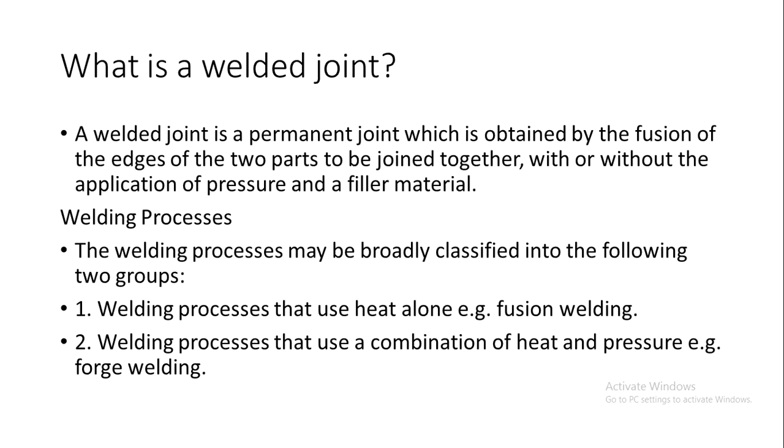So it is when two plates or two edges are joined together by the fusion of the two edges. So either we use a filler material which is the same as that of the plate, or with the application of pressure, two joints are welded. So the welding process can be divided into two groups: welding with the help of heat alone, and welding with a combination of heat and pressure. So when only heat is used, it is called fusion welding, and when heat and pressure is used, it is called forge welding.

So, in fusion welding, there are three different types. We have the thermite welding, gas welding, and electric arc welding. In thermite welding, an iron oxide and aluminum combination called thermite is used for connecting two plates. In gas welding, a flame is provided when oxyacetylene or hydrogen gas is burnt, and this flame from the welding torch is applied on the surface of the two plates, and both are joined together.

In electric arc welding, it's similar to the gas welding. Here we have an electric arc, and an electrode made of the same material as that of the plate; this is the filler material, and it is melted and placed between the two plates to be joined together.

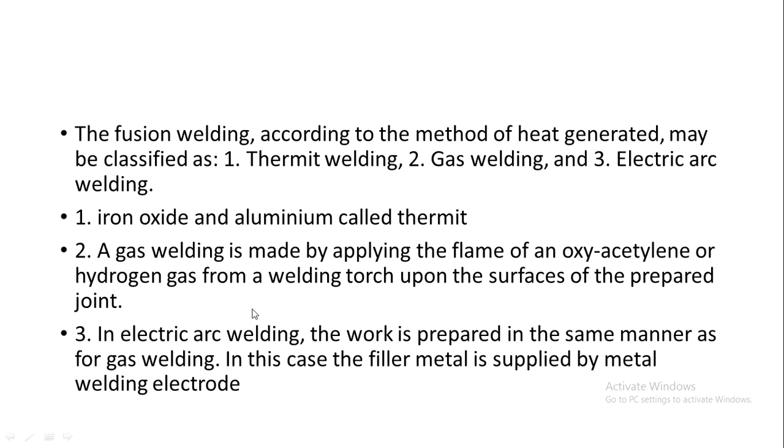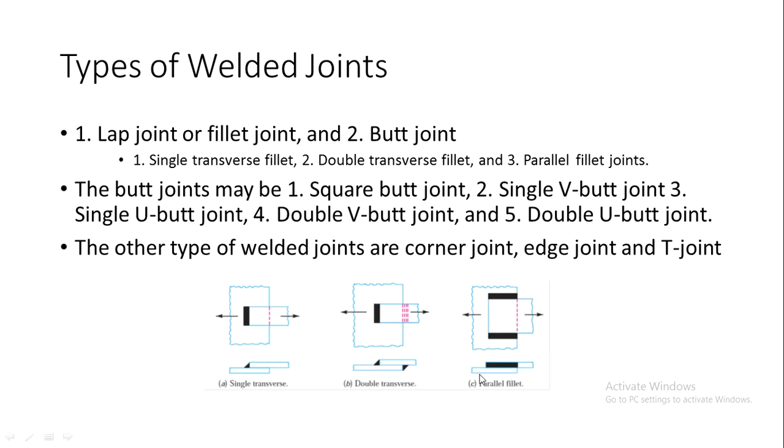First, we can see the pictures of lap joints. So we have the single transverse lap or single transverse fillet joint, where the two plates are connected using a lap joint, and only on one side we have the welding. In double transverse, on the top and on the bottom, we have the welding done. In parallel fillet, we can see that on both sides of the top plate alone, the welding is done.

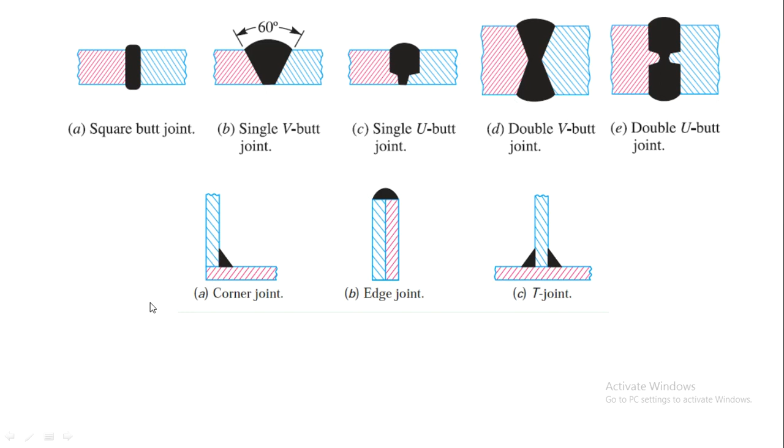So here we can see the types of butt joints: square butt, V butt, single U butt. When the thickness of the plate is larger, we go for a double type of butt joint, so we have the double V and the double U type of butt joint. When the two plates are not parallel to each other and they are at different angles, or one over the other, we go for corner joint, edge joint, and T joint.

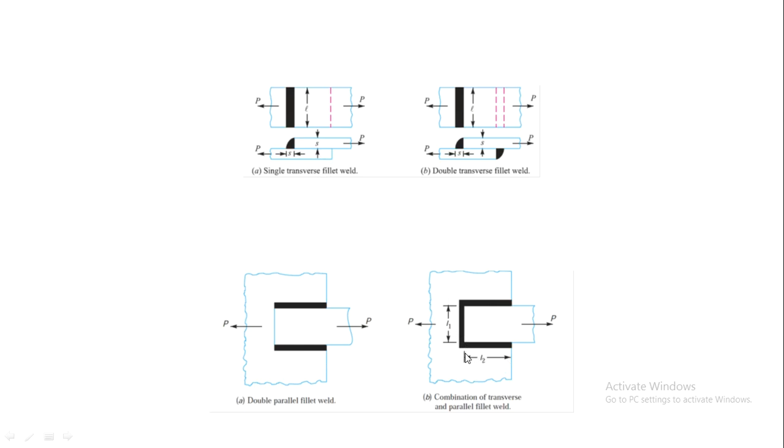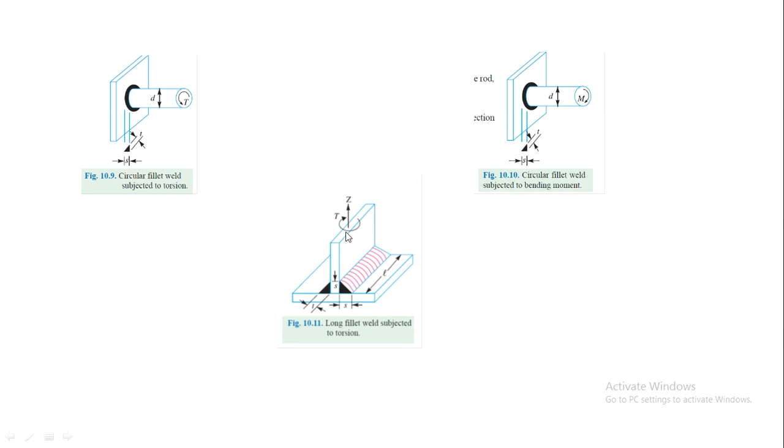So here we can see a long fillet weld which is subjected to torsion. The length of the weld is L, the thickness of the weld is S, the width of the weld is similar to the width of the plate, which is T, and then we can see the torsion T, which is acting along the perpendicular plate attached to the flat plate.

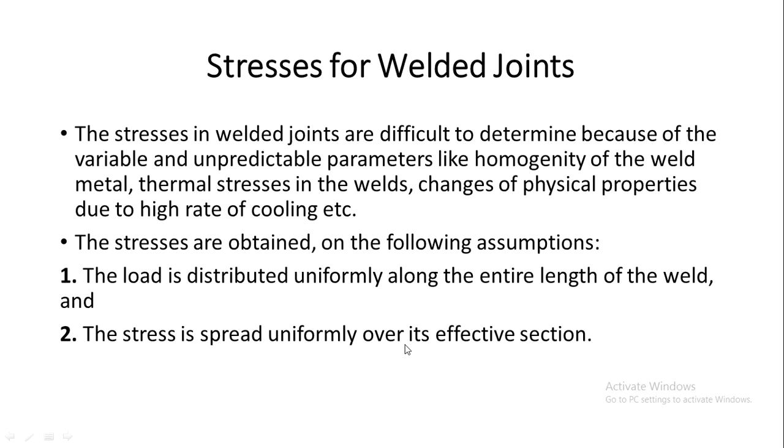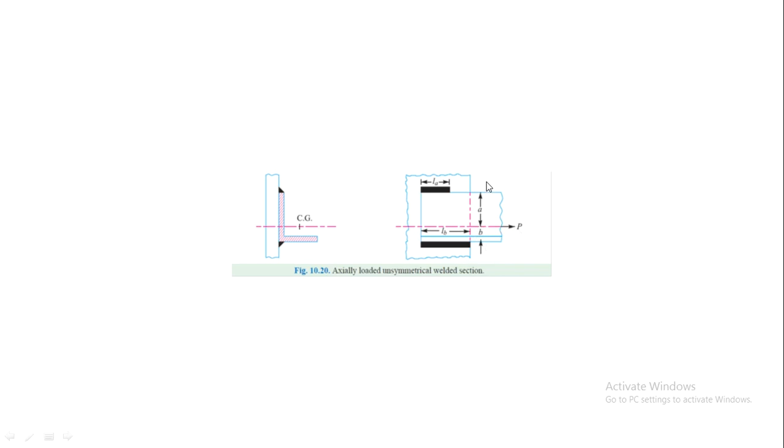So here we can see an axially loaded unsymmetric welded section. The welds are parallel welds of different lengths, LA and LB, and the distance from the axis where the load acts to the edges of the plate is A and B. A is on the top side and B is on the bottom side. So the load is acting away from the central axis. It is unsymmetric also. Thank you.